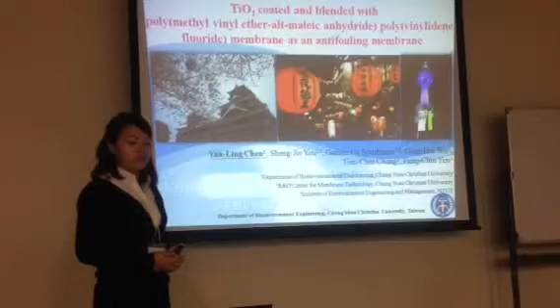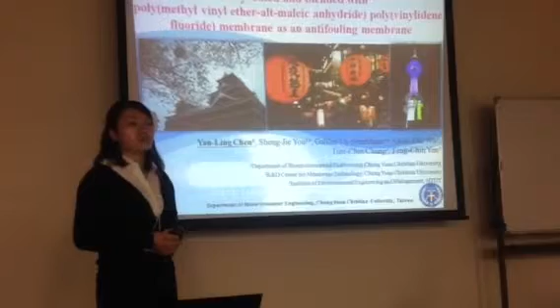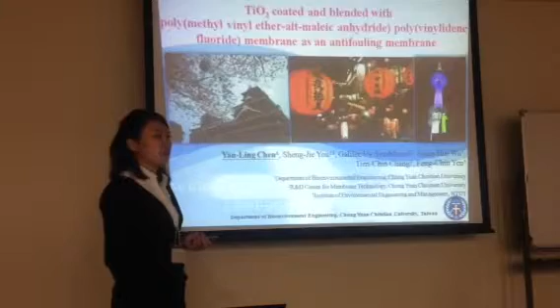Today I'm going to give a talk on TiO2 coated and blended with PVMA PVDF membrane as an antifouling membrane. The membrane which is made from PVDF is easily fouled due to its hydrophobic nature. This study attempts to mitigate fouling by combining PVDF with hydrophilic PVMA and TiO2 nanoparticles by the phase inversion method, and then uses BSA and reactive black dye to confirm the antifouling and self-cleaning capability.

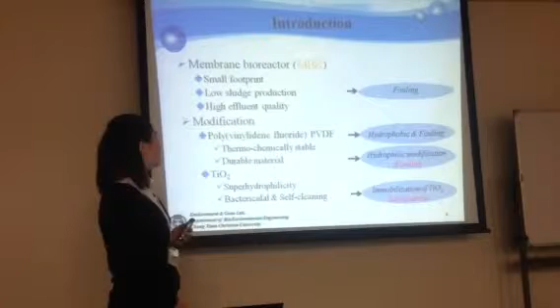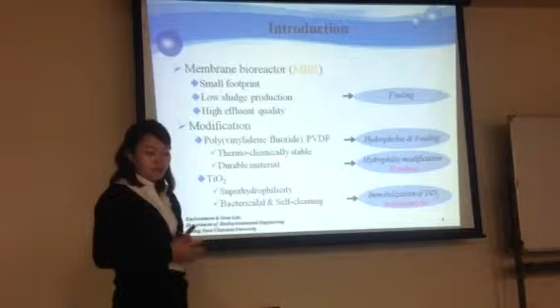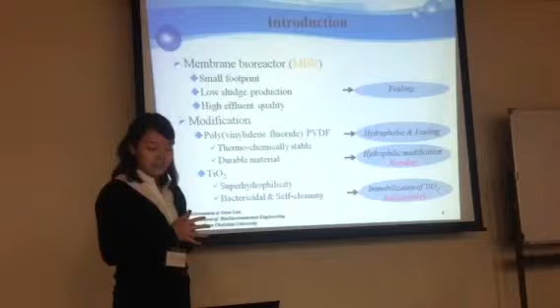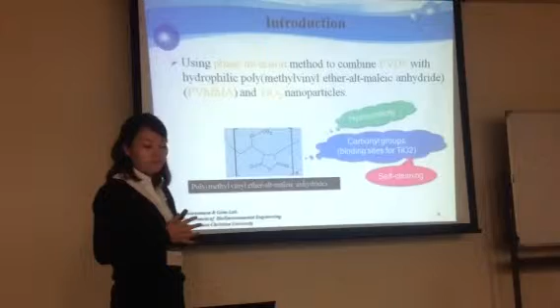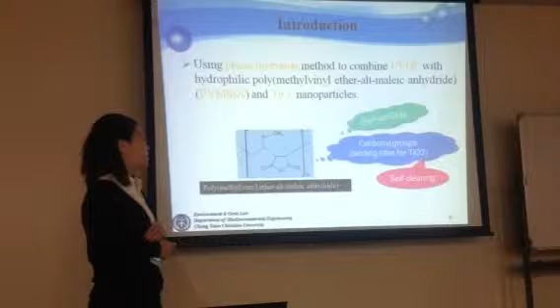To mitigate the fouling: PVDF is often employed in MBR. We try to blend the PVDF with PVMA to lend hydrophilic character and immobilize TiO2 on the membrane surface. So we use the phase inversion method to combine PVDF with PVMA and TiO2 nanoparticles. This is the structure of PVMA and these are its properties: hydrophilicity, and PVMA has binding sites for TiO2.

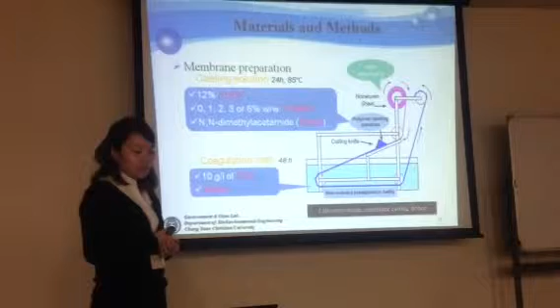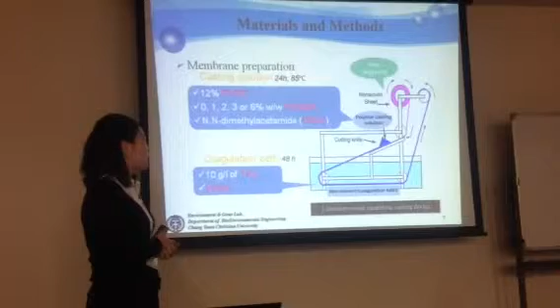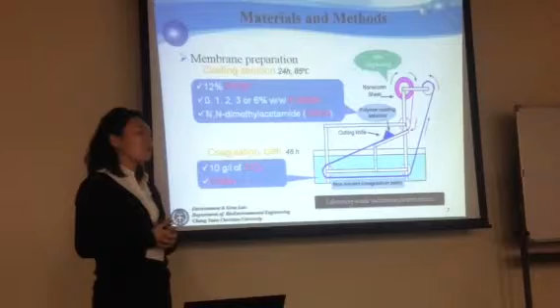For material and method, 12% PVDF and 1, 2, 3, or 6% PVMA are mixed in DMAC for 24 hours at 85 degrees into a polymer casting solution. After degassing, the membrane is cast on non-woven manually, and then put into the coagulation bath. The coagulation bath consists of 10 grams per liter of TiO2 in water for 48 hours to ensure self-assembly.

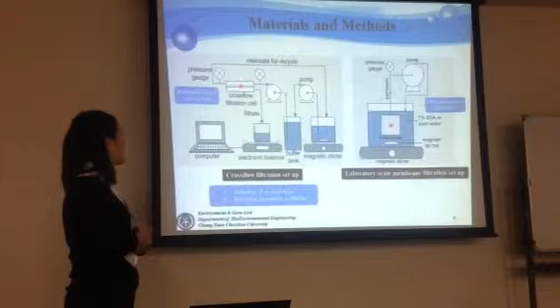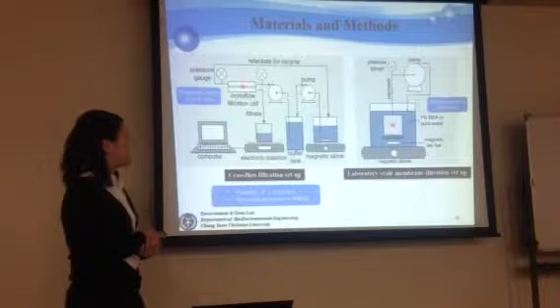This is the setup. The left figure is the cross-flow filtration setup. In this study, the membrane is cut into 4 cm by 1 cm and placed in 4 cross-flow filtration cells. The other illustration is the 2-liter laboratory scale membrane filtration setup.

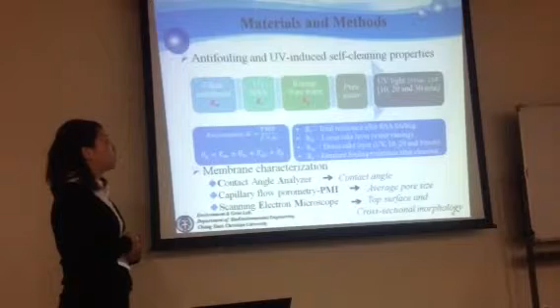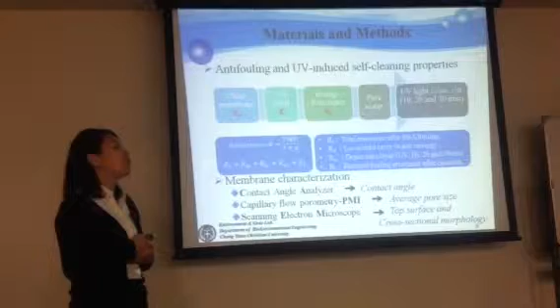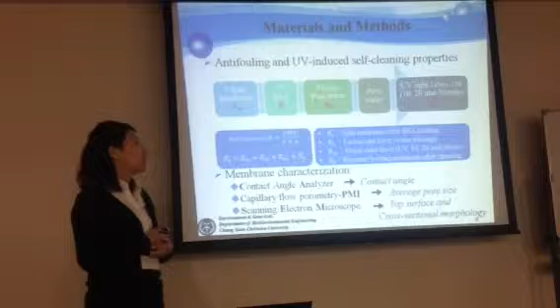In order to know the antifouling and self-cleaning properties, we conduct the following steps. The clean membrane filters pure water until the flux and TMP are constant, then the membrane is placed in the filtration setup to filter 1% BSA, then immersed in pure water to remove the loose cake layer, and then filters pure water again to determine the efficiency of the rinsing. Last, the membrane is placed under UV light repeatedly for 10, 20, and 30 minutes to determine the remnant fouling resistance.

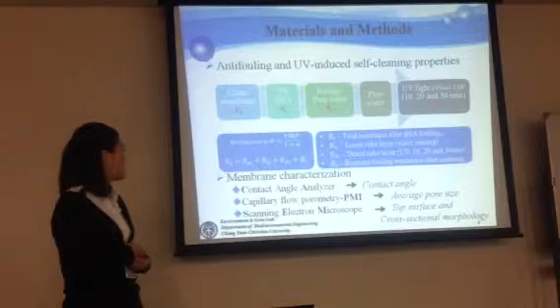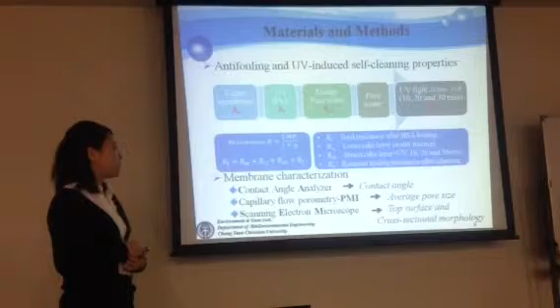For membrane characterization, we use contact angle analysis for the contact angle, PMI for the average pore size, and SEM for the top surface and cross-section morphology.

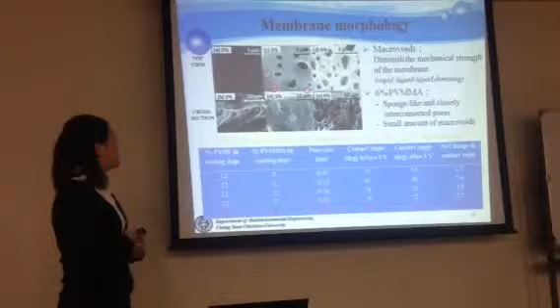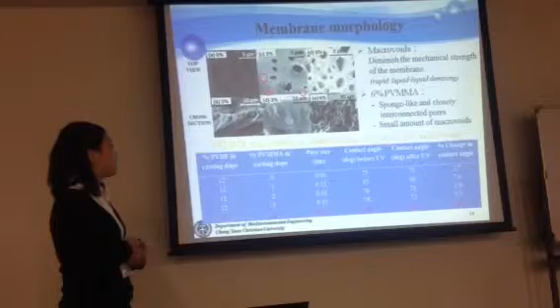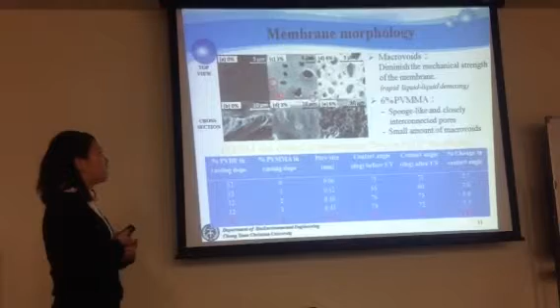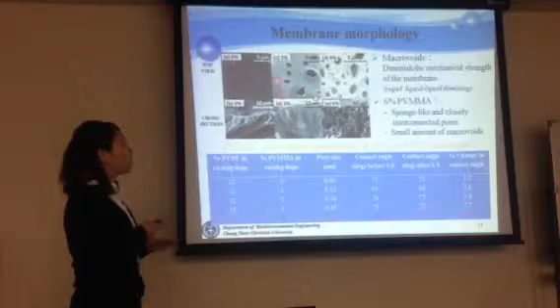So here comes the results and discussion. For the membrane morphology, the additive alters the membrane properties. This table shows the membrane average pore size and contact angle with respect to the concentration of PVMMA. From the picture, we can see that the lower concentration of PVMMA goes along with smaller pore size. However, the formation of macrovoids goes along with higher concentration. And we found that 6% PVMMA has the best membrane morphology.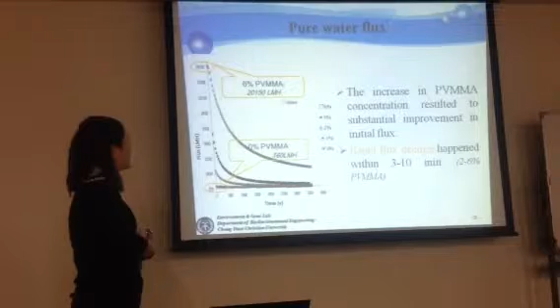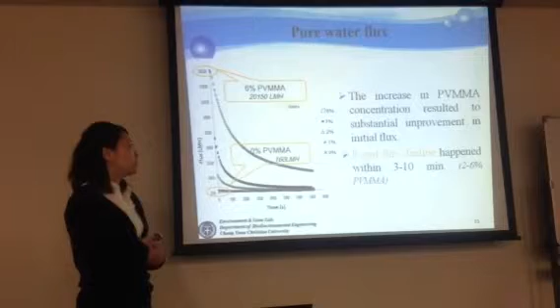For the membrane hydrophilicity, the possible reason for the increasing contact angle before UV light may be that the tendrils of PVMMA were packed too densely at the membrane surface, so hydration was compromised. For pure water flux, 6% PVMMA is 130 times higher than 0% PVMMA. The increase in PVMMA concentration results in substantial improvement in initial flux. The rapid flux decline happened within 3 to 10 minutes for 2 to 6% PVMMA.

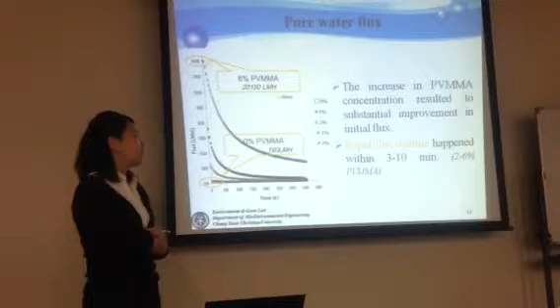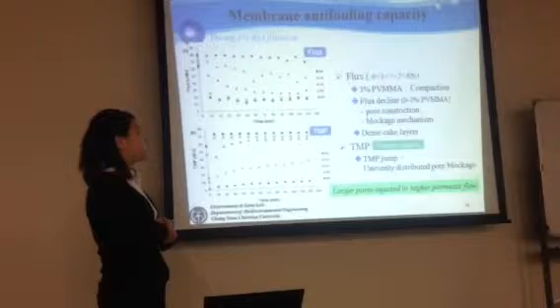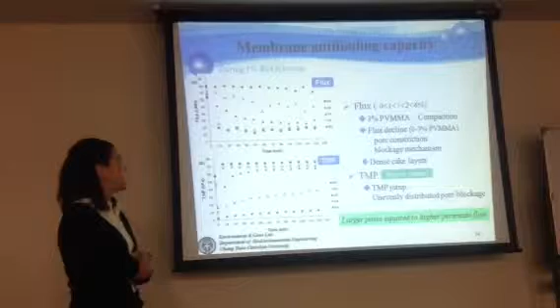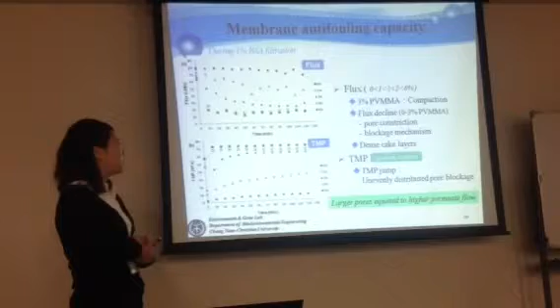For the membrane antifouling capacity, the possible reason for the increasing flux of 3% PVMMA may be compaction. The possible reason for the flux decline of 0 to 3% PVMMA may be the pore constriction and blockage mechanism. Because of the formation of dense cake layers, the flux may be constant at the end of filtration. The possible reason for the TMP jump here may be the uneven distribution of pore blockage, so larger pores equated to higher permeate flow.

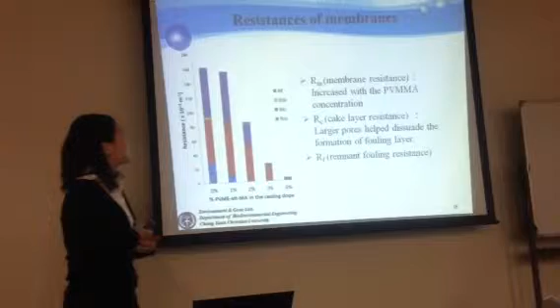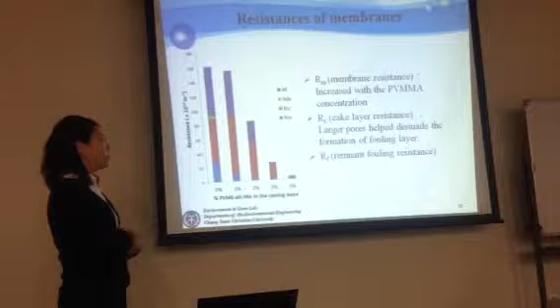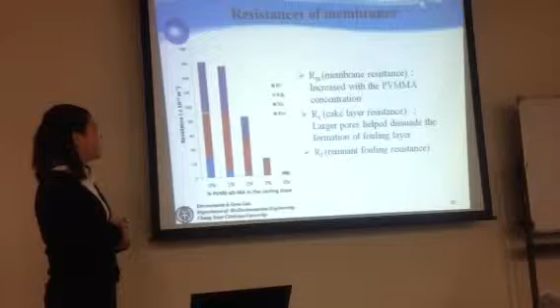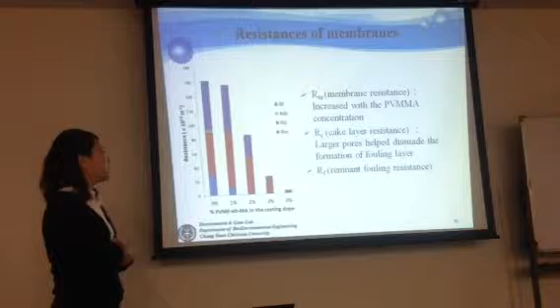For the resistance of membranes, we denote membrane resistance as Rm, cake layer resistance as Rc, and remnant fouling resistance as Rf. Membrane resistance increases with the PVMMA concentration. Rc is the sum of RDC and RLC. Larger pores help dissuade the formation of the fouling layer, so Rc decreases with the increasing PVMMA concentration.

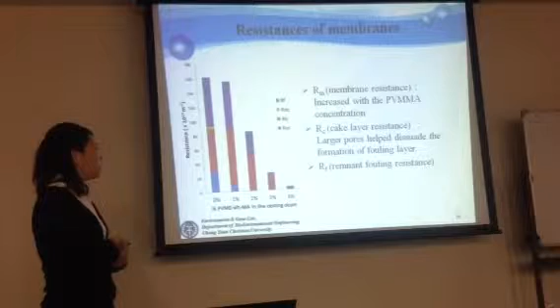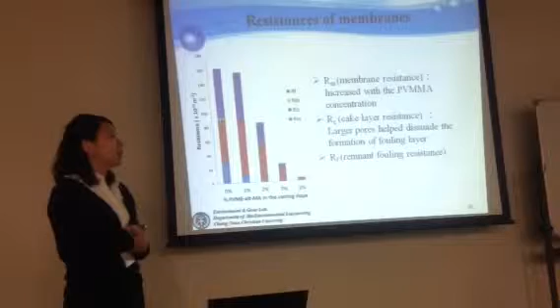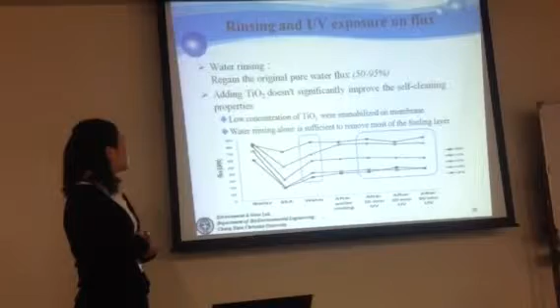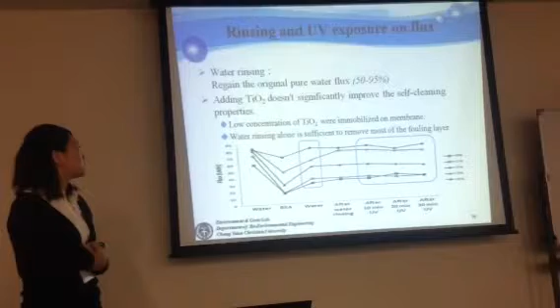For the remnant fouling resistance, because water rinsing removes almost all the cake layer, UV light has minimal impact. For the rinsing and UV exposure on flux, water rinsing helps regain 50 to 95% of the original pure water flux. Adding TiO2 doesn't significantly improve the self-cleaning properties because a low concentration of TiO2 is immobilized on the membrane. Water rinsing alone is sufficient to remove most of the fouling layer.

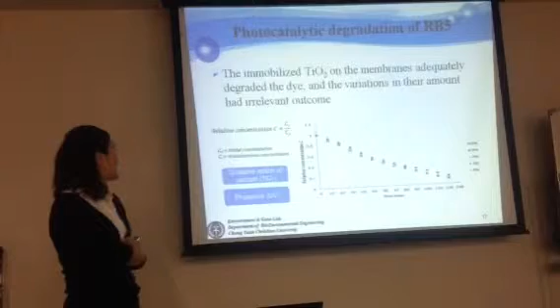For the photocatalytic degradation of RB5, the immobilized TiO2 on the membrane adequately degraded the dye, and the variation in its amount had an irrelevant outcome. With increasing time, the relative concentration decreased because of the oxidative action of radicals and photolysis.

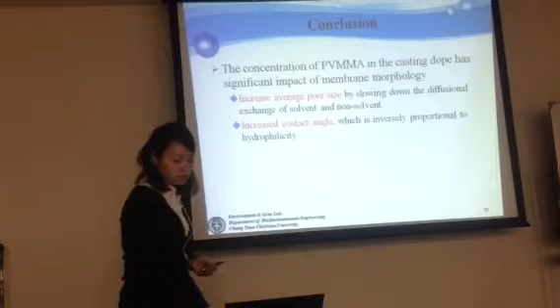So our conclusion is that the concentration of PVMMA in the casting dope has a significant impact on membrane morphology, increasing average pore size by slowing down the diffusion exchange of solvent and non-solvent, and increasing contact angle, which is inversely proportional to hydrophilicity. The membrane's flux and ability to resist fouling were more heavily influenced by morphology than hydrophilicity. The membranes with larger pores and pore interconnectivity dissuade the formation of the loose cake fouling layer.

It was able to recover the initial flux through water rinsing alone, and slightly improve the hydrophilicity of the membrane upon UV activation of the superhydrophilic effect. So this is the conclusion for PVDF, PVMMA, and TiO2.